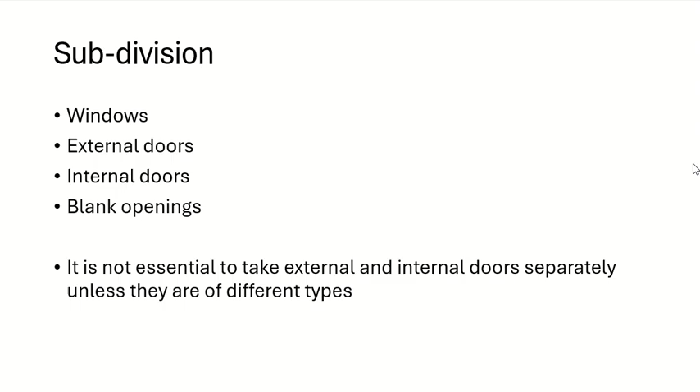And then we have the blank opening, so it's just an opening without any door, something which you have maybe in your lounge or living room, just for the purpose of decoration. And if the doors are of the same type, you can merge them together, no problem. So the distribution of doors is not mandatory.

Then windows can be made up of different materials, so they can be timber window, metal, or PVC window. PVC means what? Which material is called PVC?

PVC is sort of a plastic. It's made up of... unplasticized polyvinyl chloride. Anyways, so it's sort of a plastic.

But obviously windows will be subjected to weather, heat and sun and water, so we cannot use the normal plastic. The plastic which you see here, this cannot be put on windows directly, this will get damaged in days. So we use another type of plastic. And then windows can be made up of glass as well, or you may use glass within the window, it's very common, all windows have some portion of glass.

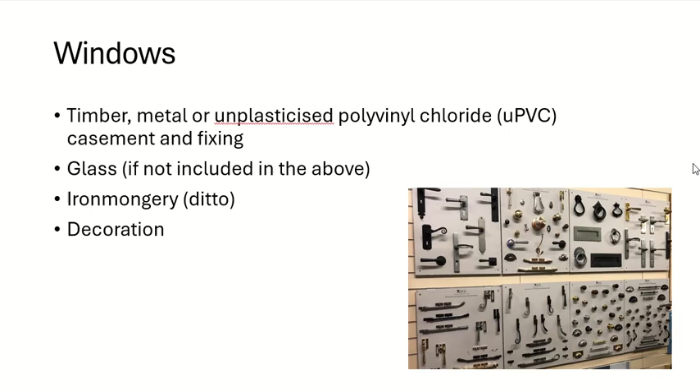And then we have the decorative items, and it can change. But if you go to NRM 2, you will find the sections, a section for decoration and a section for doors and windows.

When we were calculating the quantities for plaster and block work, did we subtract the doors and windows or not? No, we didn't. So after you calculate the quantities of doors and windows, then you go back and make the adjustments in the quantities of block, paint, plaster and these things. It's like backfilling, you cannot calculate backfilling if you do not calculate the quantity of material under the substructure, because backfilling is whatever is remaining. Same principle goes here. If you did not calculate the quantities of doors and windows correctly, you cannot make these adjustments accurately.

So what are we going to adjust? Already mentioned brickwork or block work, whatever type of wall you have, and all internal finishes. Now what is included in internal finishes? Tell me. Skirting, painting. Flooring also? Yes, it is included in internal finishes, but we don't need to make the adjustment for flooring, because I already mentioned under the door you have normal flooring.

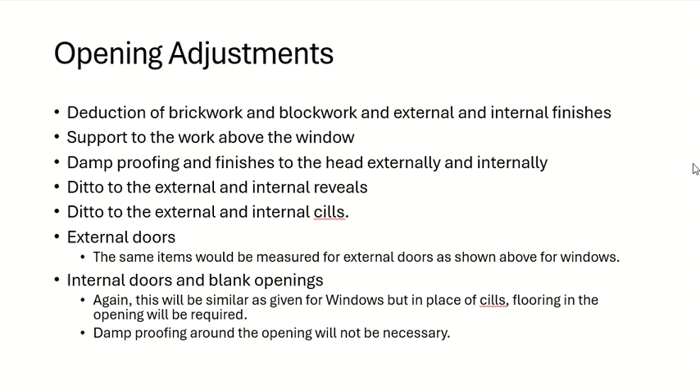External doors - all these items must be adjusted for external doors and internal doors as well. So all adjustments are required for doors and windows, all types of doors, all types of windows, and even for openings as well.

When you are preparing the schedule for doors and windows - this schedule means the list - you have to make a checklist, and this checklist should have a numbering. So first of all, the thing which you do is prepare a list for doors and windows in your building, and for that list you prepare a code.

Somebody wants to know which window you are talking about, he will pick the code and he can go in the drawing and see which door or window you are talking about. I hope the link works.

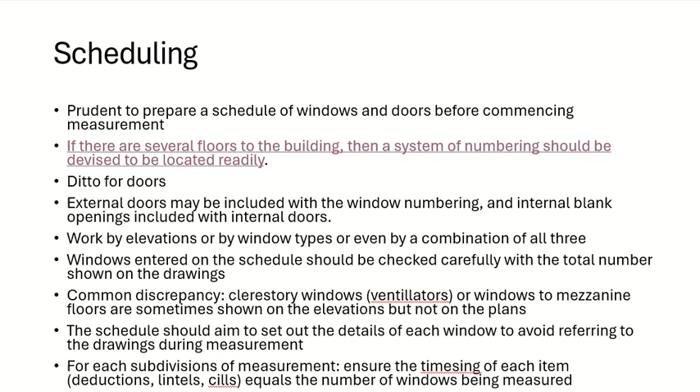Then we have windows like this - they call them dormer windows, the ones which look like a triangle. Again they are not normal, they are very high. In case of these windows, the window itself may be taken with the other windows, and the adjustment of the roof can normally be taken with the roofs. So this dormer window needs adjustment in the roof itself - it's part of the roof. You can make the adjustment later on.

A very good practice which they have mentioned - you can do it for your projects and the exam as well. If there are many items and they are almost the same, but maybe one or two items have some slight difference between them - for example, you have many walls and all of them are of the same height, but there is one wall which has, let's say, 200 millimeters less height. What you will do is take all walls the same, or all windows the same, then for this one item, make an extra addition or extra deduction.

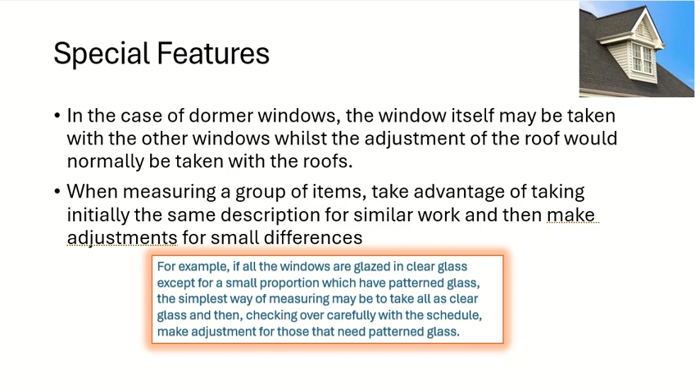They have given an example here: all windows have glazed clear glass, except for a small proportion which has patterned glass. So you combine all these windows together. For this one portion, you will subtract the clear glass and add the patterned glass later on in the end. For the rest of the work, they are all the same, so you calculate the items together.

So normally the frames are made up of timber, metal, or unplasticized PVC, uPVC. You can count them with numbers. The frames and the doors and the windows, they can be counted. How many doors? Because they will come in sets, right? It will not be like, give me one frame of this by this. The frame will come complete. He will not bring one rod and two rods.

So you can count them with numbers, or you can just make the reference to the catalog. When you are counting them in numbers, you should attach a diagram so they know what type of frame you are talking about. Or if you have a supplier who will supply you these doors and frames for doors and windows, then you can refer to the catalog of this supplier, that catalog, item number, this and this, so anybody can go and check what you are talking about. But this will only work if you have a specific supplier, because different suppliers don't have the same catalog. If you have noticed, even for the same item, they make some changes for marketing purposes.

The method of fixing must be shown unless you don't care. Do it anyway, I just want my window, bolt it, nail it, whatever you want to do, put it with glue, I don't care. Otherwise you should mention it.

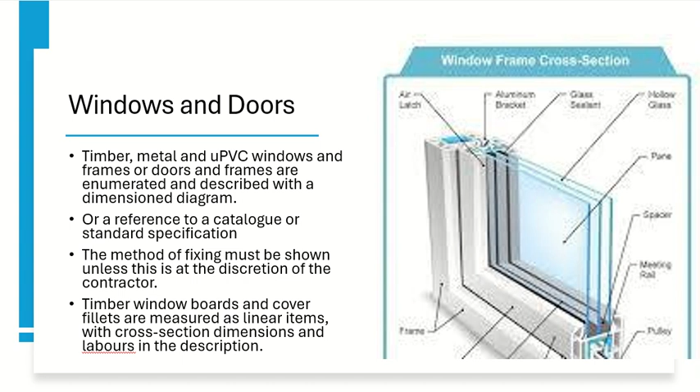Timber window boards and cover fillets are measured as linear items. So if you have a timber frame, then you will provide the linear measurements for that, and the cross section. Obviously we already discussed that when you are mentioning length, then cross section goes in the description. And the labor charges are included in all of them, so there are no labor charges separately.

For the glass, again, the manufacturer can have specifications for the glass, so you cannot just go and cut glass of any type, any size. You may have some available sizes, so you can refer to the catalog. Otherwise, if you are not doing this, then you can measure the area of the glass, and the area of the glass should be measured after deducting the frame. So you can see the window, there the frame, and then the glass is inside. So you deduct the frame, and mullions is something which we use for fixing the glass, so all these things must be deducted.

If you have so this is straight. If you have a curved glass, or some sort of shape in the glass, then it should be included within your specification.

If you have a double glazed glass, so there are two sheets of glasses, then you have to put the numbers. Two glasses of this type. Got it?

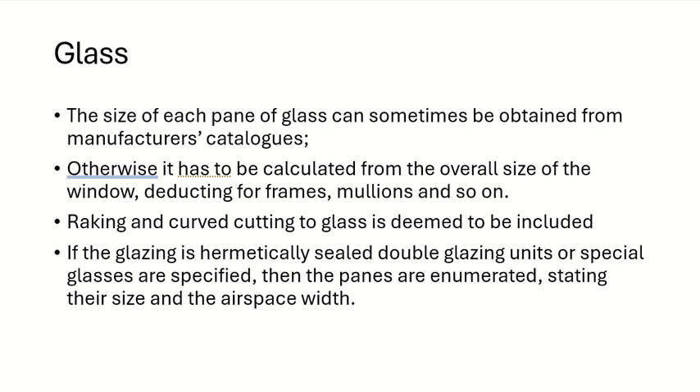Ironmongery, I already mentioned. Handles, locks, anything which is made up of. So these stoppers which you see on the top, they are all part of ironmongery. And if not supplied with the windows, then you will again give them as numbers. 4 locks, 5 stoppers, and so on and so forth.

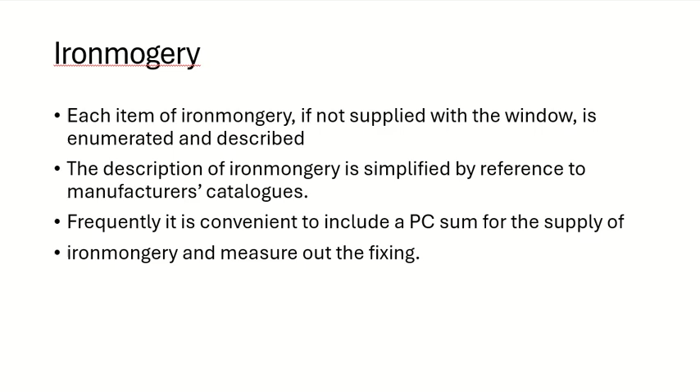The description, again, you can refer to the supplier's catalog, and it is sometimes easy to include a total sum for the supply of these items. So for supply of all ironmongery items, this is the sum, instead of writing each and every number. For all locks and all handles and this much, we have 500 BDs, and that's it.

Decoration is measured as a superficial item, so it is not part of the doors and windows, something separate. And the measurements can be taken, it depends upon what type of decoration you have.

The description would be for decoration to glazed surfaces irrespective of the size of the pane. So when you are measuring the decoration, it will not be according to the size of the window or the size of the glass. It will be something separate.

These measurements should include any paint items, any extra frame, any cutting which you are doing, because this is not part of the window. So you gave the quantities of window, and then there is decoration on the window. Even if it is of the same size, you have to calculate and show it separately. It will not be taken, because without decoration your window is complete.

So the contractor can install and fix the window without decoration, no problem, okay, if you do not mention it in the bill.

Priming means it's a paint, it's a coat of paint, a layer of paint, that is called priming, and you may do it before fixing the frame. It gives adhesion, helps you with the fixing of the frame.

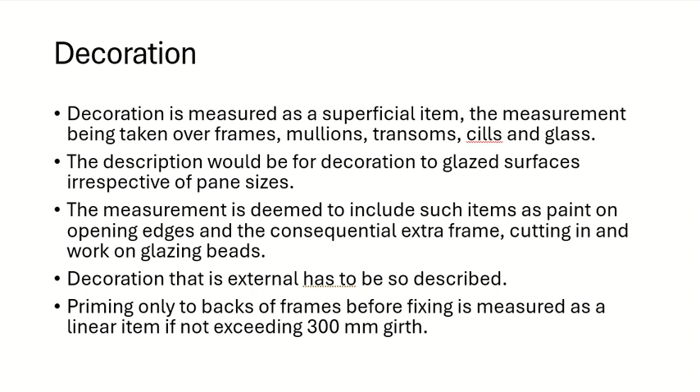This can be measured as a linear item if the width is not more than 300 millimeters. For openings, I already mentioned the deduction in the... let me make it bigger.

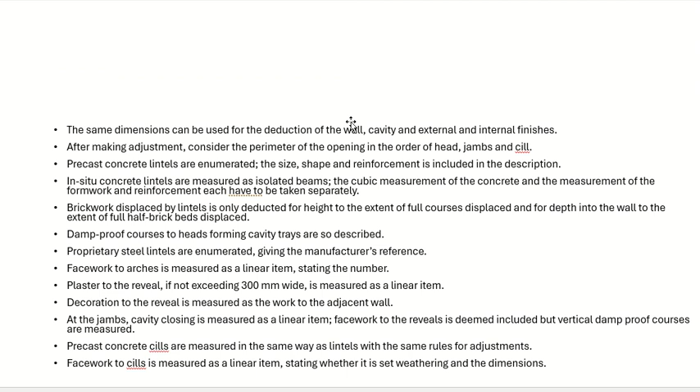After making the adjustment, you have to consider the perimeter of the opening, because you have to put the paint and plaster on the perimeter, because now it is open, it doesn't have a door or a window, so you have to take care of it. On top of the opening, you may use a slab, they call it lintel.

Lintel is an item which you put over openings, doors and windows to support the load coming over it, to save the doors, windows and openings from taking the structural load.

So these lintels can be precast or they can be in situ. Precast meaning they will prepare and bring it. In situ means you will put them on the site, you will mix the concrete and put them on the site.

If they are precast, you can measure them in terms of numbers - I need 4 lintels, 5 lintels. If they are in situ, then they are the same as concrete, because you need the mixing and the placement in it.

So they can be taken as beams, like you take beams - they are small beams. The brickwork, these lintels, as I already mentioned, if you have an opening, you are putting this lintel, so the lintel will replace the blocks, right? So the blocks in this area will also need to be adjusted.

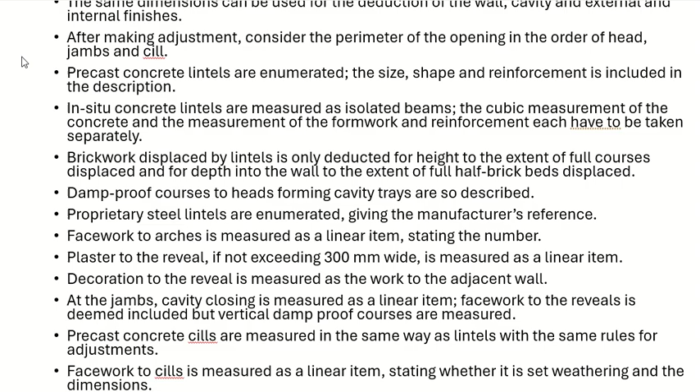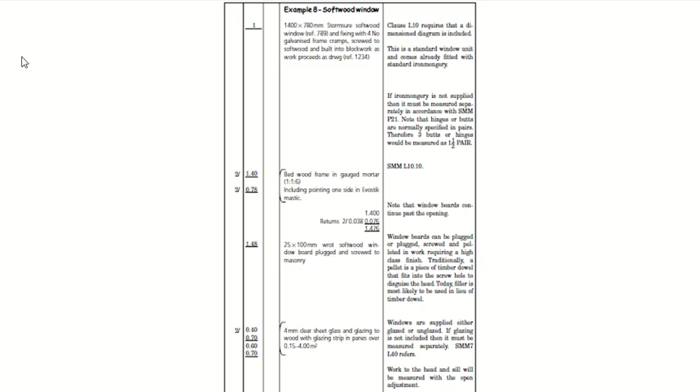1.4 is the width. So now we are talking about the softwood board. With the window we are going to put the softwood board at the bottom, which we will measure as a linear item, according to the length. But if the window is 1.4, the board will not be 1.4, it will go into the wall for better connection. So 1.4 is the width of the window plus 0.038, which is, I believe, mentioned here somewhere.

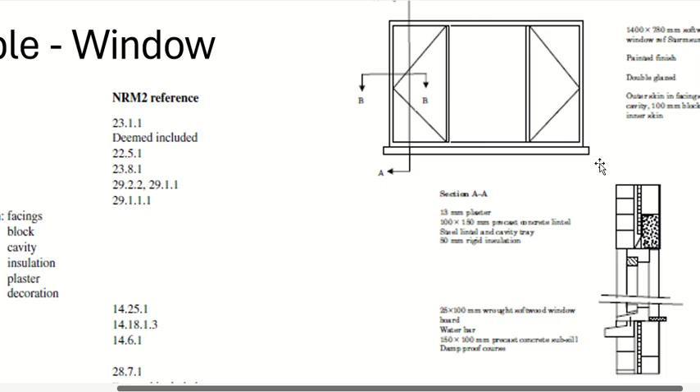0.038 was the size of the frame, it was mentioned somewhere I believe. Anyways, if this is your window, then according to the size of the frame, your board will extend into the wall. So this one - 0.038 is the width of the frame, the thickness of the frame. So again both sides, 0.038 here, 0.038 there. So this is how we are getting the size of the wooden board.

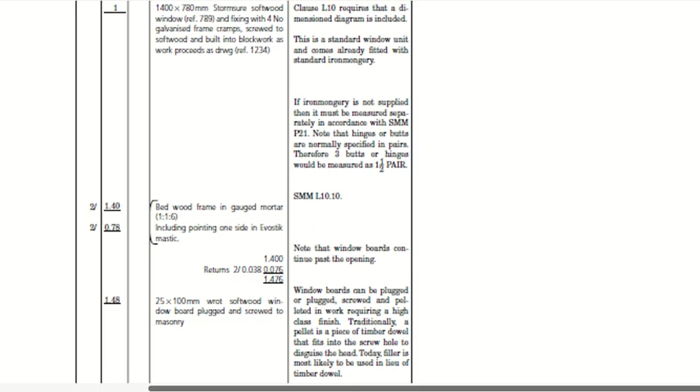These are the deductions, adjustments. Adjustments are according to the size of the window, right? An adjustment will be in the block work, in the paint, in the plaster, and so on and so forth. So you can see the items in which the adjustments are made for this one window. Adjustment in the facing of the wall, some item - obviously this is not the complete example. Adjustment in the cavity, so it's a cavity wall.

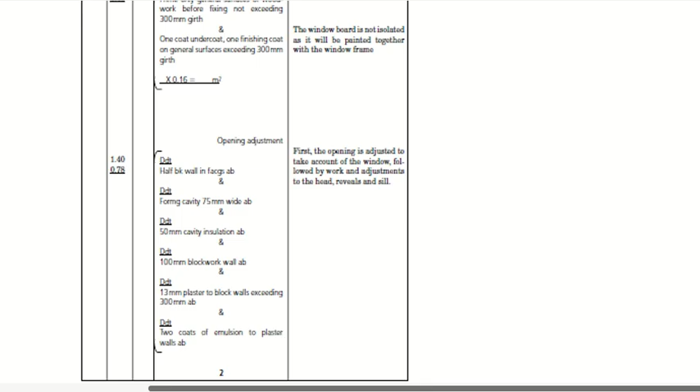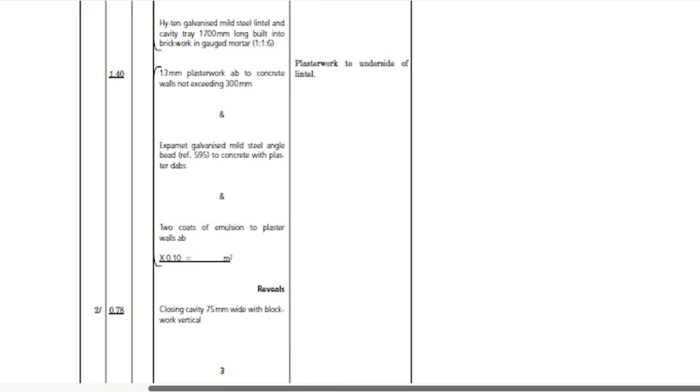So we have an item for cavity, cavity insulation - I told you earlier, when you have a cavity wall you cannot just leave it, so there is insulation as well. So deduction in the insulation, deduction in block work, deduction in plaster, deduction in paint, all according to the size of the window. The window is 1.4 into 0.78. So all these items are deducted according to the size of the window. This is, I believe, some more adjustments.

Now this is the lintel. What was lintel? What is the lintel? Yeah, it was to carry out the load. So we will put it over the window. So the width of the window is 1.4, that must be covered, right? And then you will extend it so that the load can be transferred, otherwise it will not transfer.

So it is transferred - it is going into the wall 150 millimeters on one side, 150 millimeters on the other side. So the lintel is the size of the window, plus 150 millimeters on one side, 150 millimeters on the other side, and this is, I believe, according to the size of the wall, the thickness of the wall. So this is 1.4 plus 150 millimeter extension on both sides, total 300 millimeter extension, total length of the lintel 1.7.

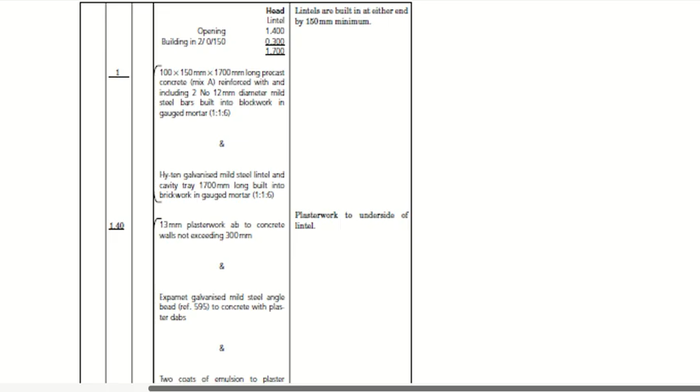What happened to this one? We already did it with the wall. This part of the wall, right? So the lintel, face, plaster and paint already in the wall. Did we deduct it? We didn't deduct it. What more one? Okay, we didn't deduct it when we are deducting the things. Okay. So plaster, and then you have

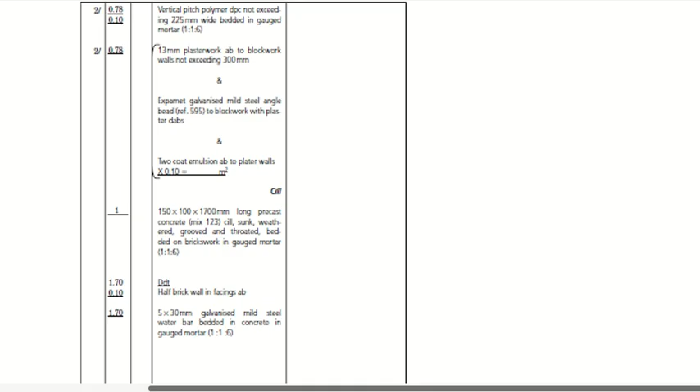the paint again. Where did it go? Yeah. The paint, the plaster, everything. Different page.

Okay, so you have the plaster at the bottom, you have the bead of steel, and then you have the emulsion paint. Okay, all at the bottom of the lintel. Okay, and then you have the closing of the cavity on the sides.

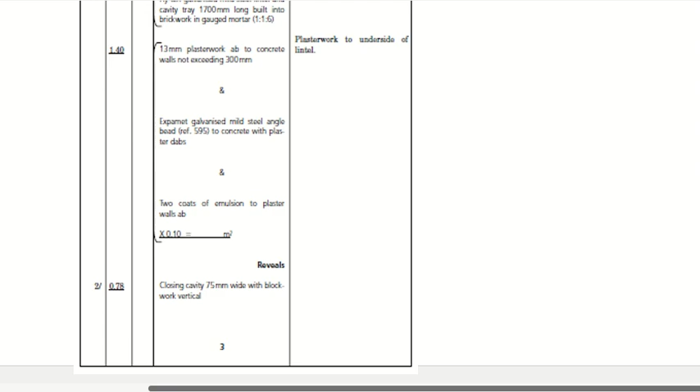Okay, two, right? Yes. Closing of the cavity on the sides. The cavity was, you have to close the cavity on the sides as well. Okay, cavity at the bottom already closed with the lintel, right? So now you have to close the cavity on the sides as well. So on the sides, we are taking the height only. Okay, 0.78 is the height of the window.

Okay, then we have the DPC. Okay, the damp proofing. Again, because there is an opening, so now you have to do the damp proofing so that there is no water penetration from this opening. Okay, so again you have the two sides.

Okay, and then you have what? So 2 into 0.78 is the sides, and 0.1 is what? Sorry? Thickness of walls. Is there anything 0.1 here?

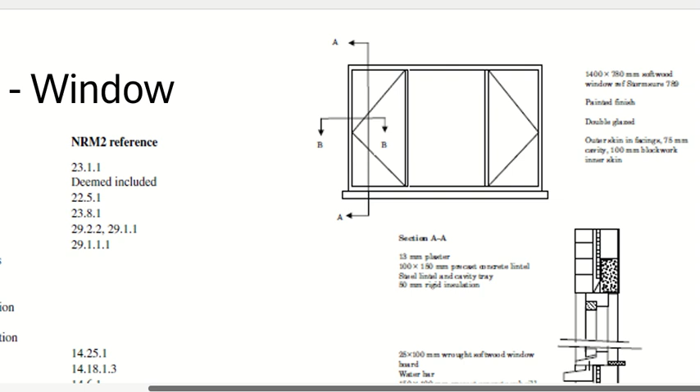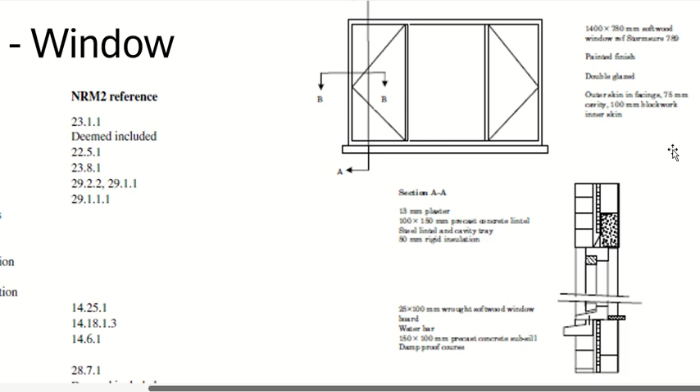Cavity is mentioned. No, but it's taken linear. Point 1 for the lintel, sorry. For the lintel. Lintel is 100 millimeters.

Okay, so 0.78 for the window, and this is 0.1. Okay, you have to close the cavity from the sides as well where the lintel is coming. Okay, where am I?

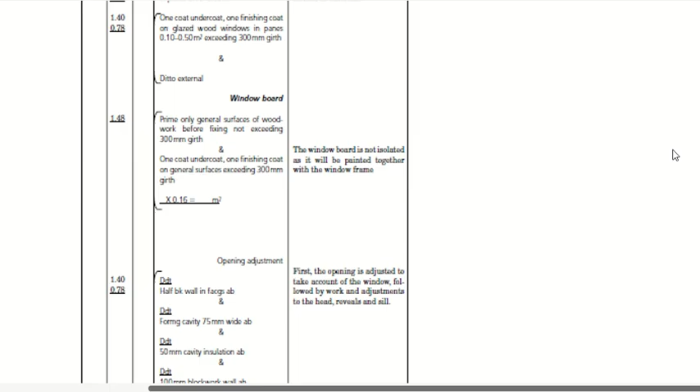Okay, the same thing which we did for the top, again for the sides, the plaster for the sides, okay, and the steel for closing the opening, and what else?

For the sill is the bottom, okay, so lintel is the top and sill is the bottom, okay, so you have at the bottom a concrete slab, a precast concrete slab of this size, okay, you can see the length is same as before. The length of sill is same as the length of the lintel. Okay. What else?

Yeah. So now you have the deduction in the brick wall for the sill now. Okay. This is for the sill. Okay. And what else? And deduction for, no, only deduction here. Okay. So half brick wall will be deducted. So it's a cavity wall. You only deduct one part of the cavity wall where the window is. Okay,

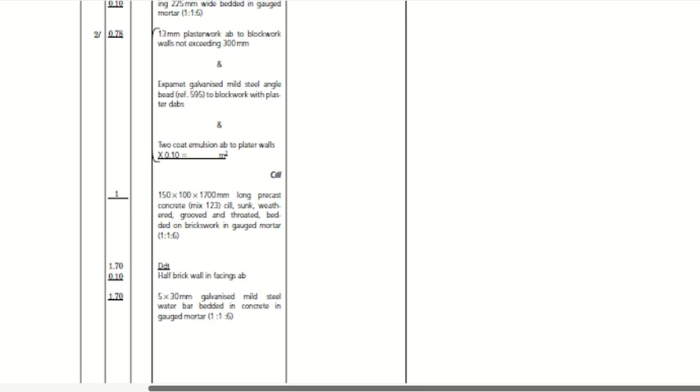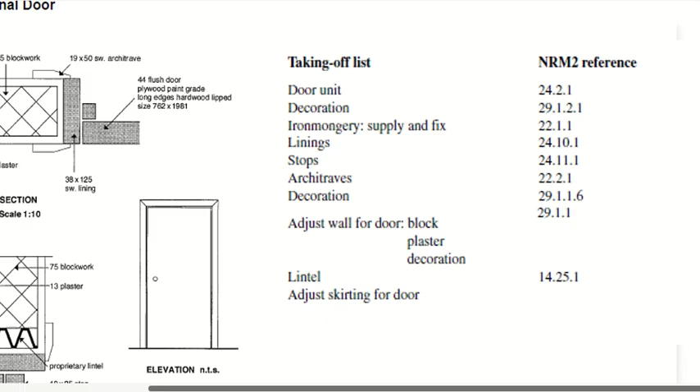and what else? Again, you have the sheet of steel, okay, at the bottom because of the opening. Okay, any questions? Okay, now tell me, you guys covered